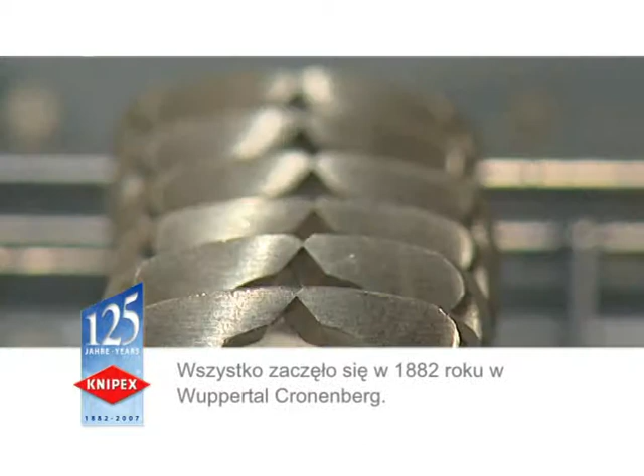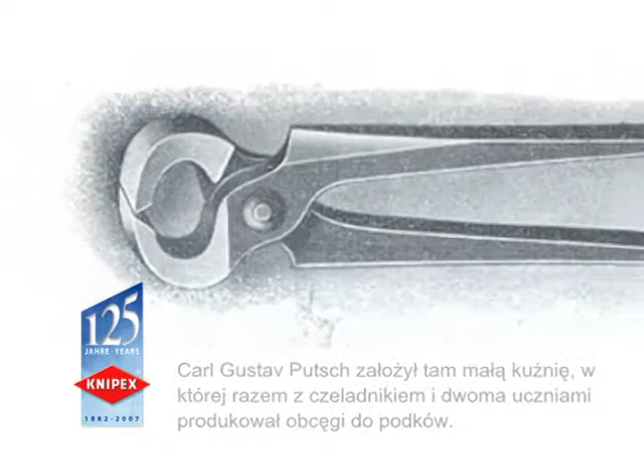It all starts in 1882 at Wuppertal-Cronenberg. Carl Gustav Putsch sets up a small forge in which he, an experienced craftsman, and 2 apprentices manufacture pincers for carpenters and farriers. In the beginning, the small enterprise produces 60 pliers per day, all handmade.

At that time, there are more than 100 producers of pliers in the Bergisches Land region, the center of German tool manufacturing. Carl Gustav Putsch and his son Carl, who took over the company in 1922, are one of the successful manufacturers. They invest and expand.

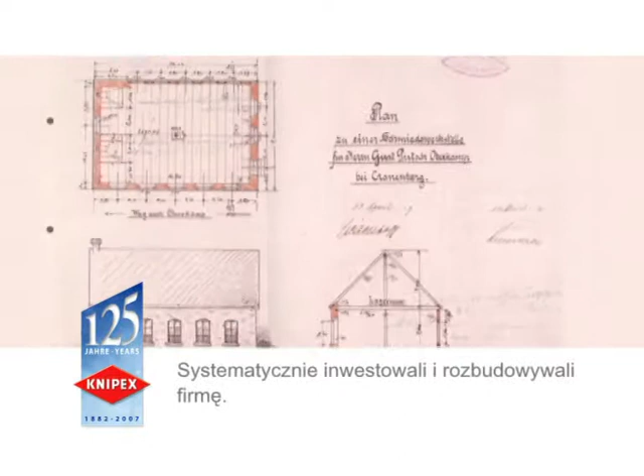The first forging hammers and modern grinding machines are purchased. The material and finish of the pliers are continuously improved. By 1927, 27 employees are producing 1,000 pliers a day.

The small workshop has grown into a factory. The pliers are mainly sold through exporters and wholesalers.

Carl Putsch recognizes how important it is to give his excellent products a proper name. First, he uses the symbol CGP for Carl Gustav Putsch. Then, in 1942, he gets the brand name Knipex registered.

After the difficult years during the war, the company resumes work without having suffered any great damage. The product range has gradually expanded. Key products such as combination pliers, diagonal cutters, and water pump pliers are added to the Knipex product line.

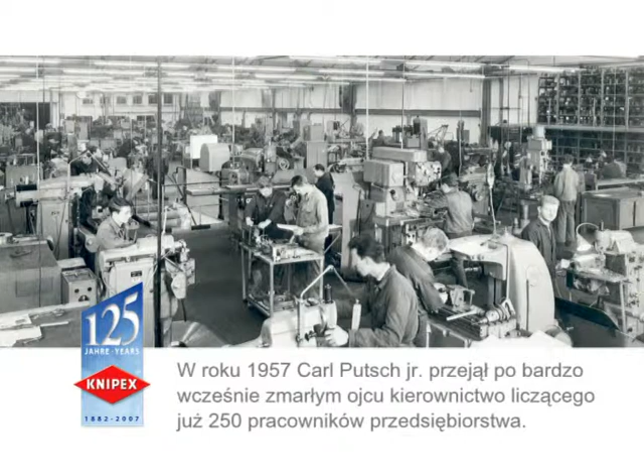In 1957, Carl Putsch Jr. takes over the management of the company from his father, who died at an early age. Knipex then has 250 employees.

As a graduate engineer, he vigorously uses modern technologies to improve production and make it more cost-efficient. He is well aware of the importance of a good price-quality ratio.

Product innovations are also becoming more and more important. The newly designed pliers are of superior quality and set new standards in the industry.

Carl Putsch's wife Ilse merits a large share of the success. She is largely active in sales and enjoys great respect in the industry. A large number of countries are now supplied directly, and the Knipex network of representatives is growing.

Knipex first becomes the leading manufacturer of pliers in Germany and then in Europe. By 1987, the company employs a workforce of 500, and Ralf Putsch joins the company.

Ralf then assumes sole responsibility for the company in 1996. The up-and-coming generation continues to build on the solid foundations that built Knipex.

The distribution system is further extended and Knipex marketing is reinforced. The first sales offices are founded and staff engaged abroad. Several manufacturers join the Knipex group. With their help, Knipex strengthens its position in certain product and market segments.

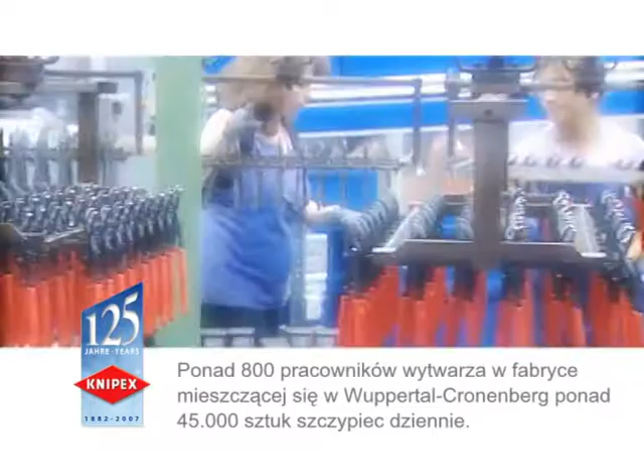Today, Knipex is the world's leading brand of pliers. More than 800 employees at Cronenberg produce over 45,000 pliers a day. To offer the best tool for every application, the product range now consists of over 1,000 pliers.

The continuous improvement of the range requires creative minds. How can hand force be reduced when cutting and gripping? How can work be done faster? How can the load and life cycle of pliers be raised? With what material and design? How do we improve ergonomics and safety?

Again and again, our fresh ideas create a competitive advantage. Modern software and systems engineering turn our ideas to the stage needed for production.

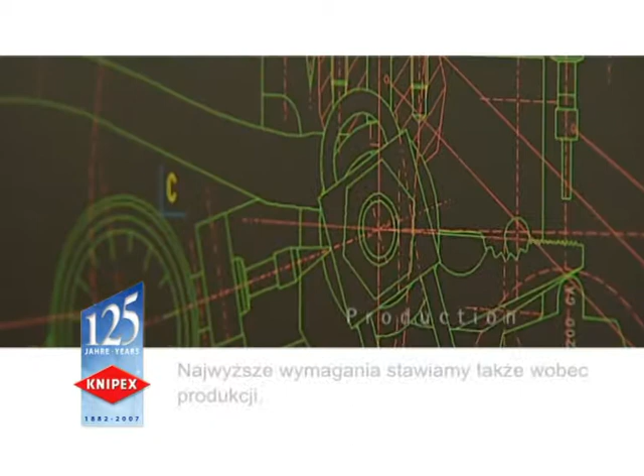We place high demands on our production. It is important that we directly control all conditions and processes. The high-quality steel is produced to our own specifications. The forging dies are milled internally on the basis of design data.

The foundation for quality is laid during forging, just as it was 125 years ago. Modern production machines carry out the subsequent machining and assembly operations.

We influence material properties by means of modern controlled heat treatment and thus achieve the best relationship between tool hardness and toughness.

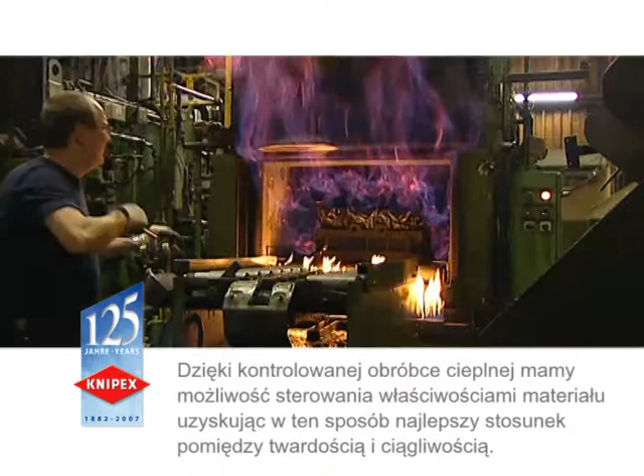The efficient production of pliers meeting the highest demands requires both modern technology and an experienced, well-trained workforce. These create precision and reliability. We accept nothing less.

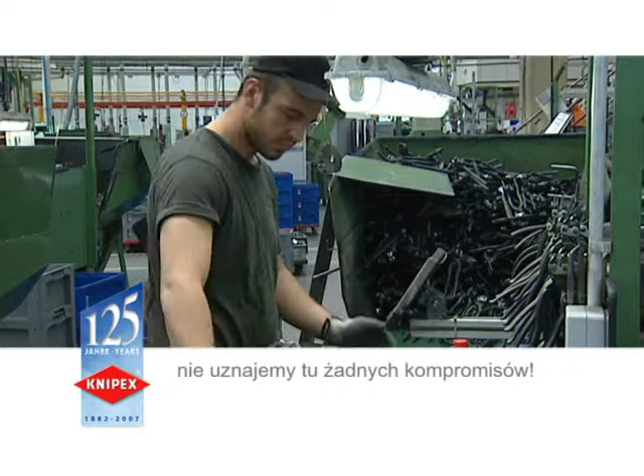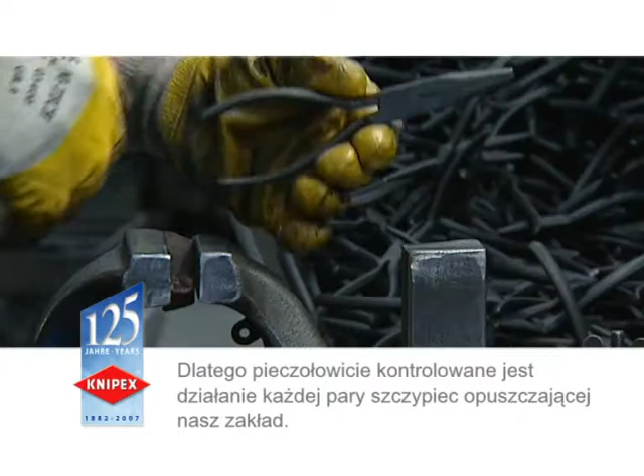100% reliability. This is what our customers expect. For this reason, each pair of pliers is checked as to faultless operation before leaving our factory.

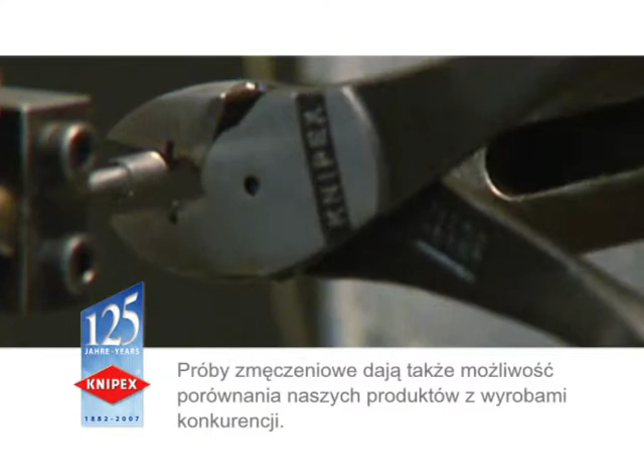We test new models and materials very extensively in our laboratory. Only those that pass the rigorous Knipex test procedures are released from manufacturing. Our endurance test shows just how great our lead is over our competitors.

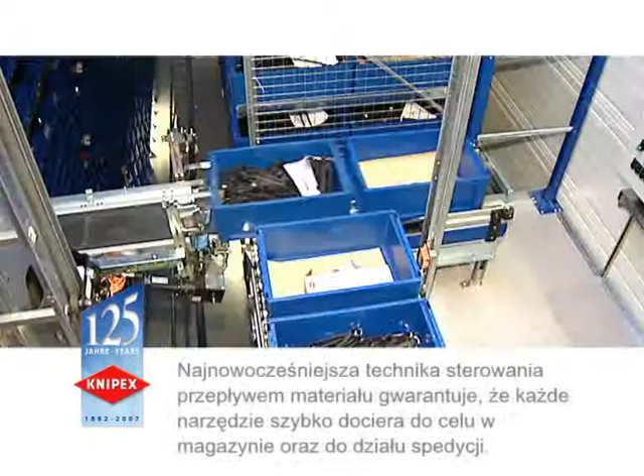Tens of thousands of pliers a day require a well-tuned logistics system, particularly in view of the high number of variations. Ultra-modern material flow techniques make sure that each pair of pliers reaches the right place in the warehouse or shipping department.

From here, the pliers are sent to all continents. We are present in 100 countries of the world thanks to our importers, representatives, and branches. Although each market is different, there is always a path ahead.

The key to success lies in close, effective cooperation with our partners. Our export share today is 65%.

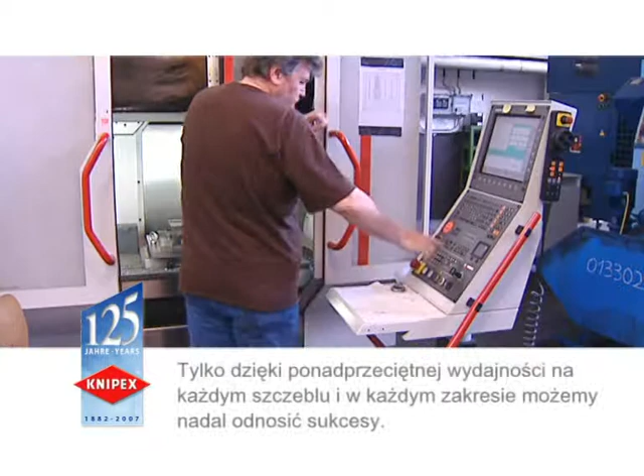We fully realize that our workforce represents our most important asset. Our employees have the knowledge and ability without which we would be unable to maintain our competitive edge. Only by above-average performances in all sectors and at all levels can we be successful in the future.

The special commitment of our staff and short decision-making paths are the typical advantages of a family-owned company.

Values are important to us. We do not wish for success at all costs, and not at the expense of the environment.

The demands placed on our work and services are steadily increasing. That is why we are not only investing in machinery and buildings, but also especially in apprenticeship and ongoing training. We need both to sustain continuous modernization.

We believe that companies should be good citizens. That is why we get involved in many ways, and particularly in the social and cultural fields. We support many schools, clubs, and other initiatives in our town.

Our annual benefit concert for parts of the world in need has already become an important tradition. We are proud of the many employees who support us in our involvement.

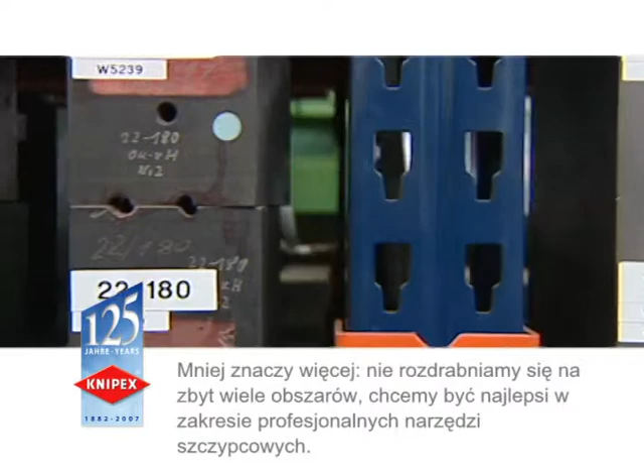Less is more. We are not losing our way in too many areas. We want to be the best when it comes to pliers.

Quality is decisive. We place the highest demands on our products and all our activities.

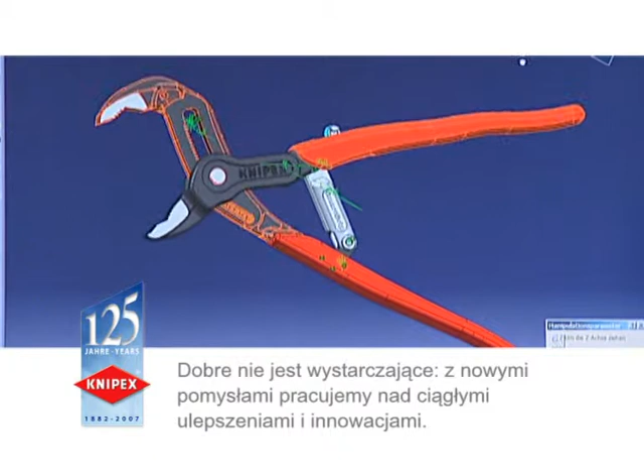Good is not good enough. We work with new ideas for continuous improvements.

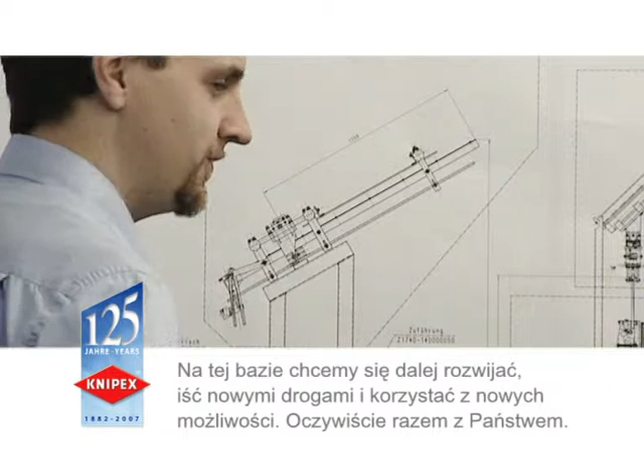Values count. We aim for a fair and good relationship with our workforce, partners, and environment. This is the basis on which we wish to grow, embark on new paths, and make use of our favorable chances, together with you as our valued partners.